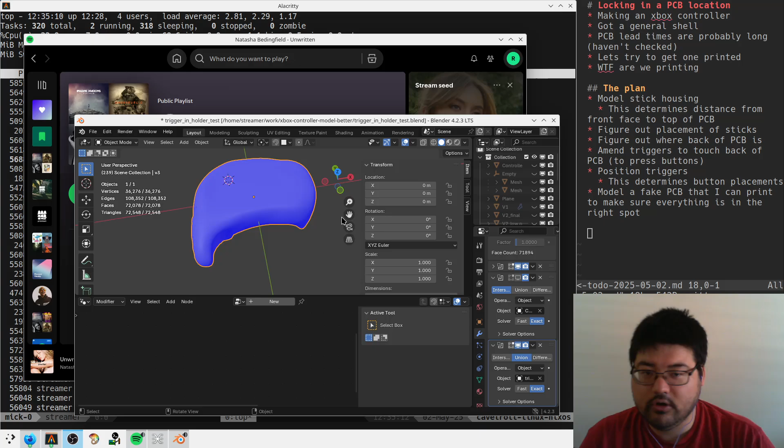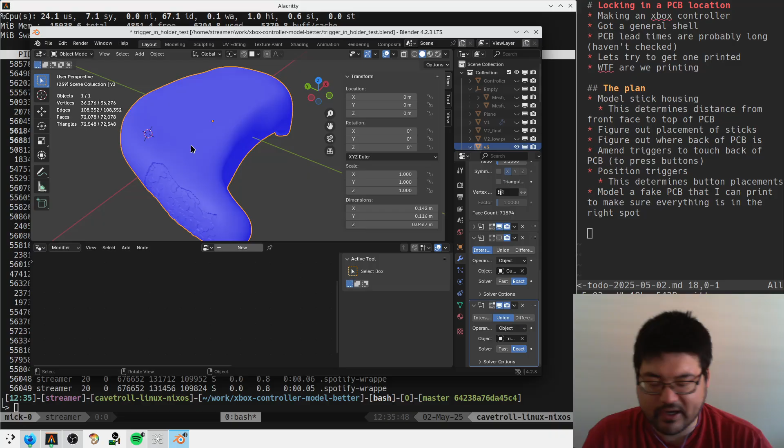Today we are trying to figure out where the PCB is gonna go in our handmade Xbox controller. Background context: I want to make an Xbox controller because I wanted to write my own firmware, so I could have the paddles on the back of my existing Xbox controller be their own buttons instead of remapping in firmware to face buttons. So obviously the next step is to just make an Xbox controller from scratch, right?

So here's the current state. We started by modeling a little guy out of clay. I just grabbed a blob of clay and pushed it around until it felt kind of okay in my hand. The controller looks kind of weird because I hold my controller weird when I'm playing shooters.

My right hand kind of wraps around the top to get more above the right stick for accuracy, and that means I don't actually rest my hand on this right nub ever, so I just didn't put it on. I want paddles on the back, and I want the paddles to kind of be like triggers, so I just found where those will sit.

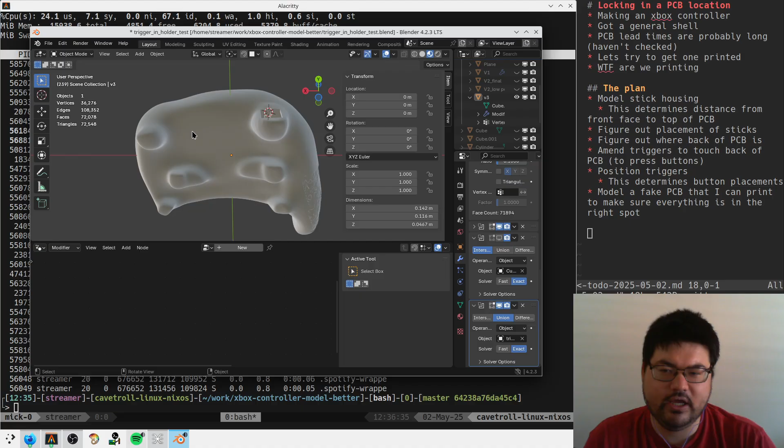Eventually we remodeled this thing in Blender, printed it, and found out we needed to add a little grip texture here, so we did that. But this is kind of a shape that feels good in my hand. I have this thing mostly printed - the print kind of failed a little bit, but holding this feels quite good to me.

All of these triggers are pressable. We've got button placements that feel kind of okay as well, just cut holes in the front to see if they felt kind of right to my hand. So that's where we are.

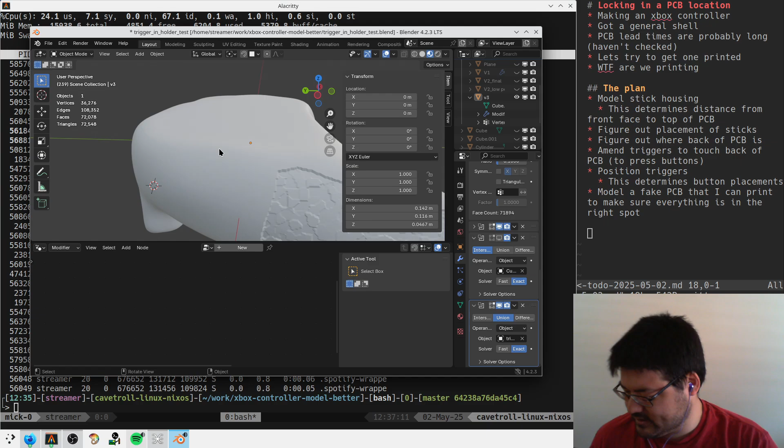So next step, I think, now that we have an overall shape, is we need to make a PCB to put electronics on, because the controller's got to do some stuff. So today I want to figure out where the fuck that PCB is going to go.

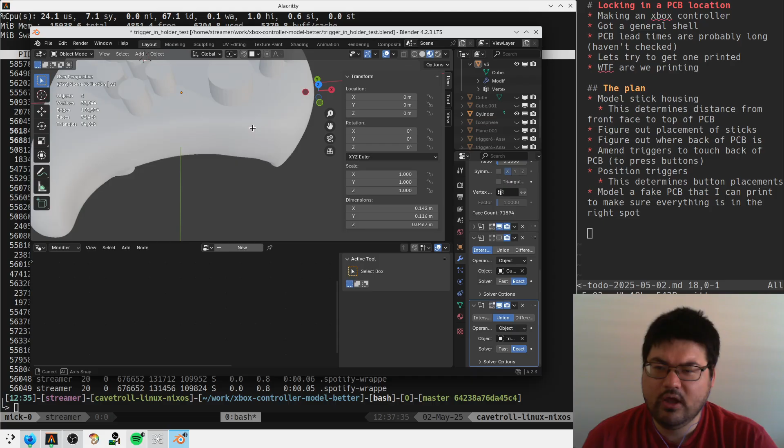First of all, we'll bring this guy back. This is where I've decided all the buttons are going to go. Where the PCB is vertically is probably determined by the stick locations, I would assume. So we're gonna have this stick coming out here, and it's gonna go into these little guys I bought from AliExpress.

Let's see if I can get one out and show. It's in this tight little plastic bag, which is a little annoying, but I've almost got it out. I gotta pull - here we go. Okay, this guy - this is an Xbox or PlayStation 5 Hall sensor replacement for the potentiometers.

This guy's gotta basically sit on top of the PCB, bloop, and then I have this PS5 stick grippy replacement that you kind of stick on top, bloop, right? This sits on the PCB, and I want this to be on my thumb. We got to figure out...

Where that will determine where the board sits vertically. So we'll kind of figure out this box will go here. It looks kind of like this.

Then once we have that, placement of the front buttons will be really easy, right? These are just directly under all of the holes for the buttons we've already put, so there's nothing really to worry about there.

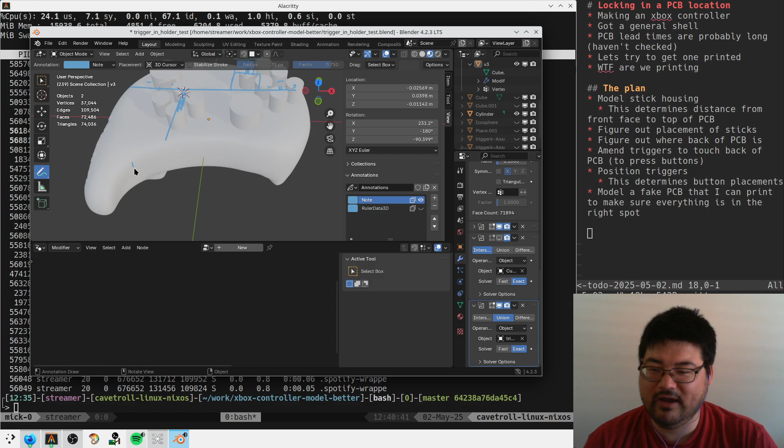Probably we're going to have to extrude this a little bit so that there's space for these sticks to press, or maybe the pinky buttons might work a little differently. Maybe we'll bring this in as well so that it's more vertical and we don't need so much backward space.

But figuring out the shape of this line depends on the height of the controller as well. So the plan of action is to figure out this guy, his dimensions, maybe model him as well so that we can figure out where the holes in the PCB are going to go at the bottom. Then once we have that, we can figure out this height. Then we can put all of the triggers in the places they're supposed to go, amend them so that they hit the right location this way, and then figure it from there.

That's the plan. Is this for one hand or some shit?

No, it's just that my right hand kind of rotates over the top a little bit just when I play games to get a better control of the right stick. And so I'm just doing it that way. Just whatever feels good in my hand, man. What's the point of making my own Xbox controller if I can't make it in a way that's comfortable for me and my weird ass grip?

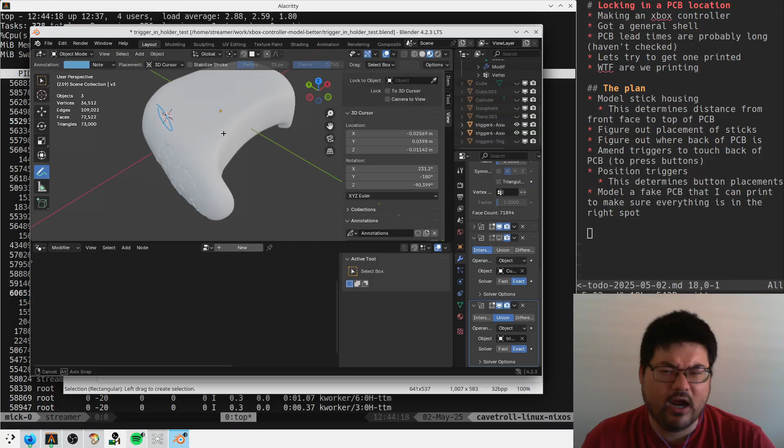Are you using Blender instead of FreeCAD, or is it for different things? I'm using FreeCAD for anything precise and Blender for anything that is... so the problem here is that this shell is sculpted. I'm kind of just freeballing the shape of this thing to fit my hands based off of the model, and I don't really know how to sculpt and modify something in an artsy way in FreeCAD. FreeCAD, I feel like I understand how to use it for precise work: make this shape, then this shape, then this shape, and stick them all together. But this is not that. So I'm using FreeCAD for anything that I want precision and mutability, something that I can work backwards and adjust later. And then importing into Blender to stitch it all together. Maybe that's wrong, but it seems to be working for now.

In fact, we do need a FreeCAD instance up now if we're going to model this housing. So really the important part here is the pad locations, basically where these pins are going to poke through. This we need to get right.

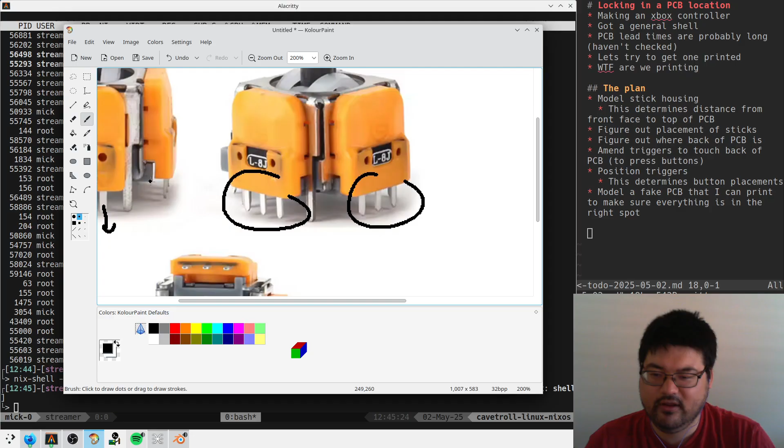So it's those guys plus this set, and then this set, as well as all of these 4 outside leggies, right?

I guess I'm going to model this in FreeCAD. We don't have to get any of the shape up here correct, we don't really care about that at all. We just care about pad placement for now, and then height.

Let's start taking some measurements. I'm not going to bother showing this because it's kind of hard, but let's start with the width of the metal box, which is around 12 millimeters. So we'll say this is 12 millimeters.

We don't really know if it's square, so I'm actually not sure which side I measured. I assume it's square, but I don't actually know - 12 on that side, 12 on that side. Can we use a different color here? Blue, light blue, what's easy to see? Purple. This is also 12.

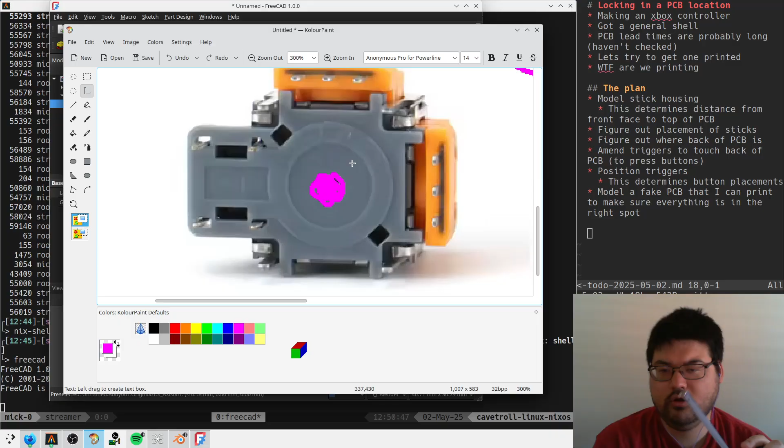Dude, what the fuck? Wait, how thick did I say this was? Did I say 12? I did, I said 12. So that makes more sense based on what I'm measuring here. So 12 is - it's so hard to tell. Hold on, I wish I should get calipers, dude. Calipers, pretty hype.

So I think this is 12, which then I assume probably means - oh, you can kind of see where the metal wraps, so that lines up, right? The metal ends here and here, which probably means that this is also probably 12 here. Probably. Let me confirm that.

Yeah, that seems right. Okay, so we're trying to figure out these things that are kind of sticking down here - these are kind of the edges of the metal box, right?

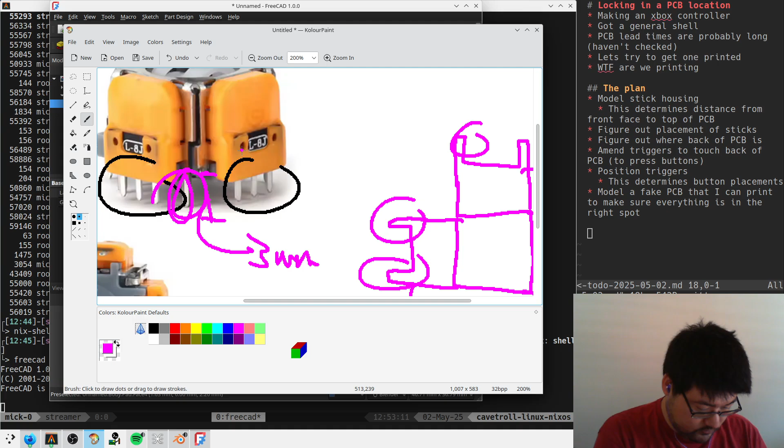Oh, only two sides of these have them. So I lied about this metal sheet. It probably looked more like this.

So they're kind of... Yeah, I don't know how thick these are. They're 3 millimeters long. How wide? 1 millimeter wide, and like less than a millimeter fat. So we're gonna just say 0.5 millimeters. Doesn't really matter, so we're gonna call this like 3 millimeters by 1 millimeter by 0.5 millimeters.

And then it doesn't matter which way we orient them yet. Eventually it will matter. So if these are on the outside surface, then it means...

Create sketch on face, please. Why? Oh, not part of active body. Why are there two bodies? Did I create a new one by mistake? There we go. Okay.

So we want to do something like project the existing geometry onto this thing. Boom, boom, boom, boom. And then we can start saying that we want these guys to be kind of on the corners. Boom, boom, boom, boom, boom, right? Overconstrained, fuck you.

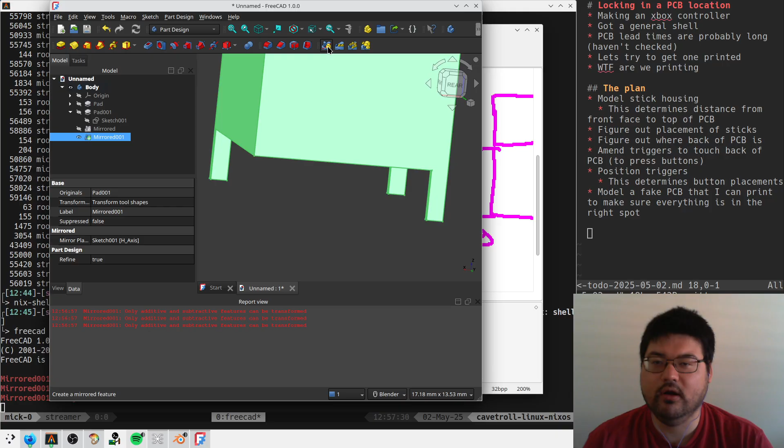Can I mirror like the sketch? I mean, we could also just add it to the sketch better. Yeah, okay, let's just do that because I don't know if we can do what I'm trying to do. So it's fine, it's fine, we'll just...

Do this. This guy's got too many constraints. Okay, fuck him, hype. Do the same shit down here. Add another box. Boom, boom, boom, boom, boom. Over constrained. And then one more, please sir. Box, box, box, box, box. Over constrained. Delete those fuckers.

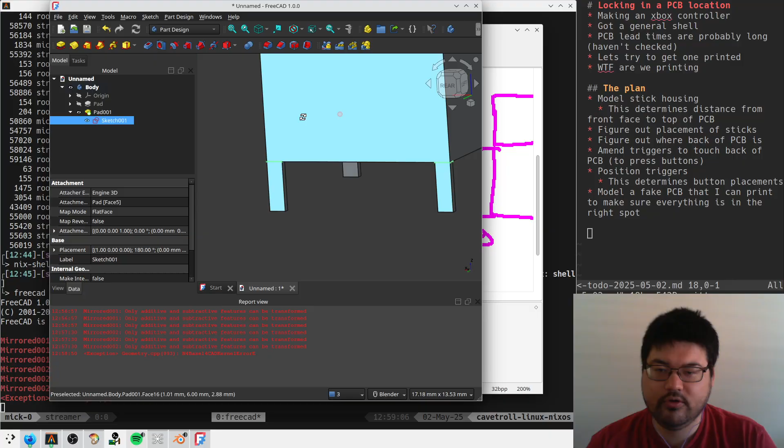Okay, and then we're going to make some equals constraints, right? So we're going to take this, we're going to say that all 4 of these walls have to be equal length. Okay, and I don't know why sometimes shift clicking doesn't fucking work, it's really annoying. And then we do the same thing with these guys. Equals. All right, fully constrained. Hype, good enough for now.

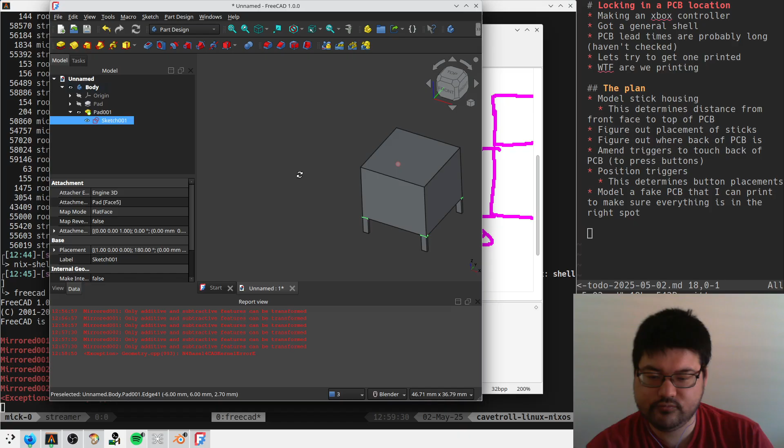You know what? I'm not gonna lie, I'm not really convinced this looks right. I'm not convinced that this is 12 by 12 by 10 because it does not look the right shape to me. Maybe it is. I'm just going to re-double check.

So it would be the height that would be wrong. No, I mean that's right. Okay, so that's 10 tall for sure, 12 wide for sure. Okay, this is why we measure, because eyeballing it, we'd get it wrong.

Okay, maybe next we tack on these little yellow extrusions. Oopsies.

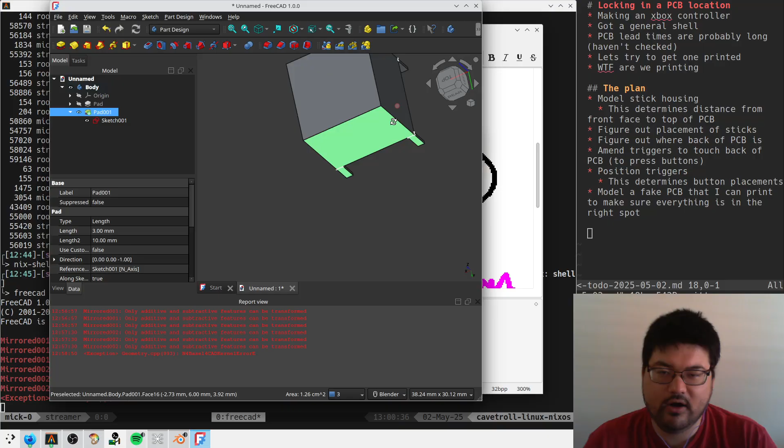So we have to make sure that these guys go on this side for one, and then because here the pins are aligned, we go counterclockwise to the next one. So we want to do this, I guess it doesn't really matter, we have to pick two faces. Oh, it does matter, the clockwise one has to be on the flat with the pins here. Okay.

I guess I measure the approximate size of this. So this is maybe like almost exactly 1 centimeter, like here. This is 1 centimeter. And then height wise, it just lines up with the top and bottom.

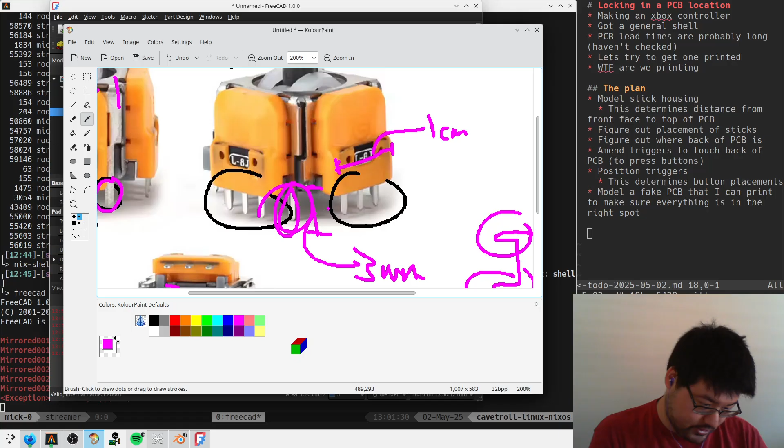So I guess we pick this face, new sketch, and we draw a box again, projected onto some of the external geometry that we care about. Probably like this shit, and then we probably care about the x-axis, but we don't have to project that. So maybe we can get away with only one projected line, which is the top line, I think.

And so we go, you know, two points of the box are constrained to that line, two points are constrained to the x-axis. And then we probably want to say that these things are symmetric over the y-axis, probably.

I thought many components had 3D models available. Is this part of the modeling experience? This won't. I did check.

So this just came from AliExpress, right? This is like an internal PS5 component that someone's copy pasted and then sold on AliExpress. I don't think this is a thing that we just have models for, because Sony's not going to publish their stuff, and the AliExpress guys, the point of these things is usually as a replacement for something that already exists. So nobody needs to measure this. Nobody's making this, I'm just repurposing this for my own thing.

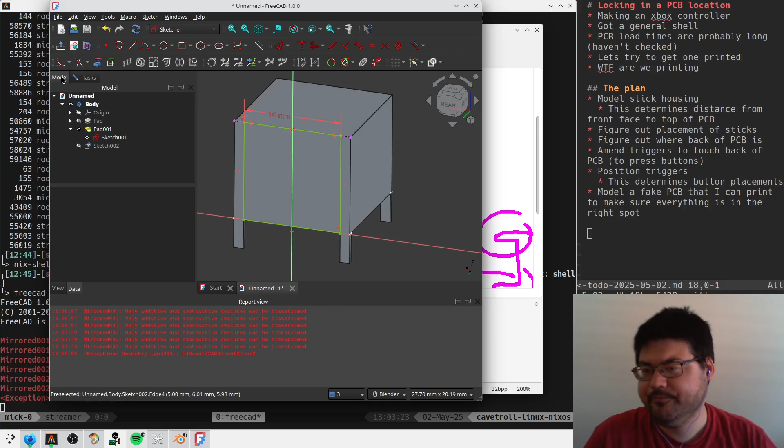Okay, so we close this, pad it by 2. All right, we're starting to look good somewhere. Let's do the same thing on this face. We project this guy, make a little box. Bop, bop, bop, bop. Over constrained, delete.

This we want to be horizontal. He doesn't like that constraint for some reason. Oh, maybe this guy we have to make horizontal. No, he doesn't like that either. Maybe it's this guy has to be vertical. There we go. And then the same thing where this is 10 millimeters. And then is this centered?

Yeah, fuck it, pretty sure. Pretty sure. Boom, boom, boom, symmetric please. And then he's fully constrained, so I guess we're chilling. And then we pad this guy up by 2 millimeters as well. Boom.

Okay, so now pin locations for the bottom of this guy. Where are these? So I guess measuring distance from the two sides, distance from the front is probably the play.

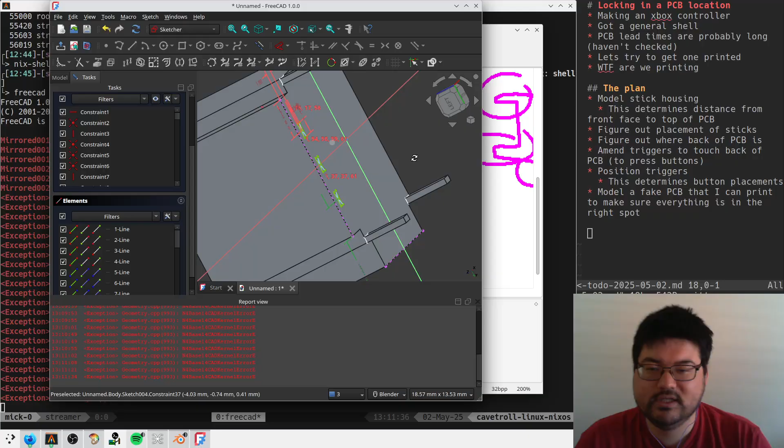Seems reasonable. This drawing is a fucking disaster. But I think that's correct. Okay, how tall are these fuckers? Like 3 millimeters.

So we take this, we say we're finished drawing for now. We'll come back to do the other pins. Pad 3. Look at that, guys, look at this. This is coming together, it's coming together.

Okay, let's do the same on the other side. I should probably save. We'll call this stick like housing or something. I don't really know what this is called, but we'll call it this.

Uh-oh, why is he mad? Sure, I guess it's kind of more this one. Okay, so we just need to give a lot of the same treatment over on the bottom as well. I think we do similar shit where we draw a box with a cross in the middle.

Okay. These are equal again. This guy's like, yo, you're over constrained. Fuck off. Whoa, what the fuck just happened?

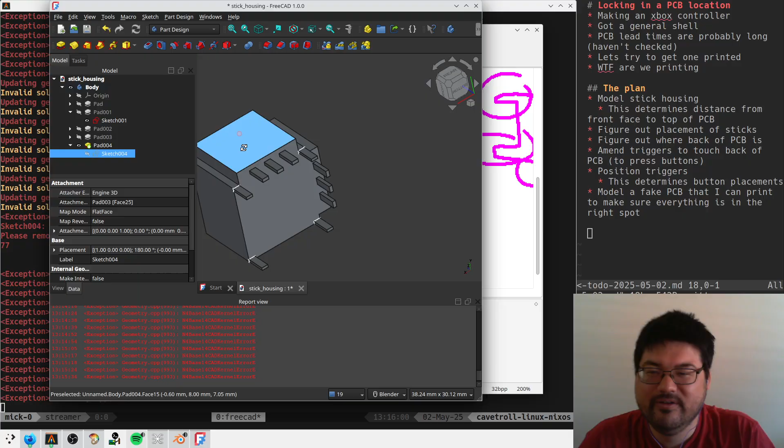Alright, so now we just need to get the clicker. So when you press down on the stick, let's see if I can show it. There's a tiny button out on the side, and when you press the stick, it presses that button.

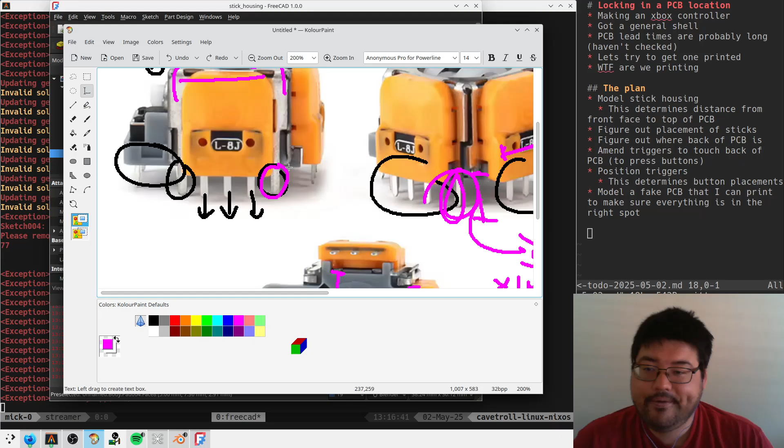So that guy lives kind of like here, so we have to model that as well. It doesn't really matter too much. I don't think that his profile is going to come into play, like where this guy's extruded. I don't think that's going to matter. But might as well just model an approximate box for that. Like, why the fuck not?

So let's call him maybe like 0.5 centimeters tall. And I actually don't know how many millimeters wide this is. Looks like 9. Weirdly, okay. So 9, and we said this was kind of 0.5, and then this was 9, we said. Okay.

This button, actually, is probably a known thing as well, so we might be able to leverage that.

It's content dense, just like Sparrow. We like it, lots of content, some of it clever, some of it a little dense. Rude, but true. Okay.

I wonder if that's the play, is we try to guess which button they have in here. I bet you it's just one of the popular ones. Okay, PS5 DualSense - what is the PS5 controller name?

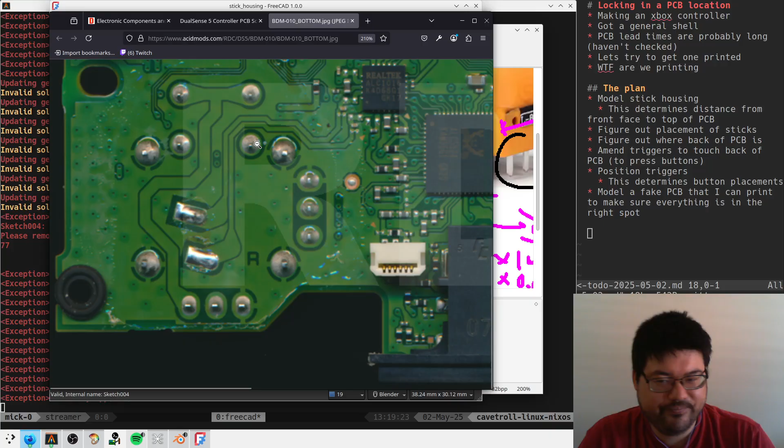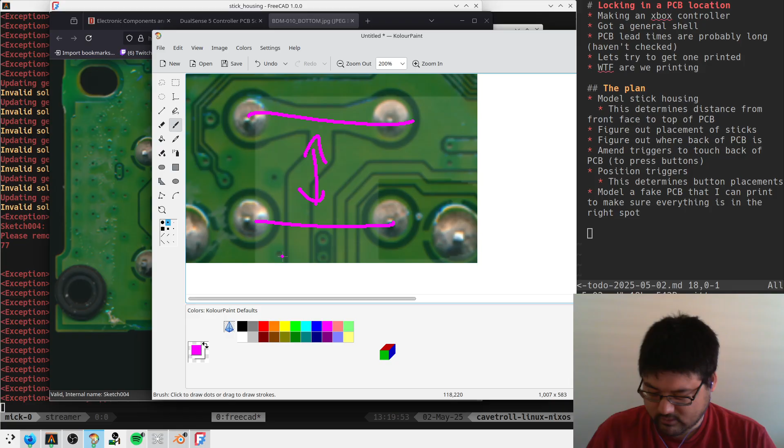Like the fact that these two pins on the switch are bridged together and these two pins are isolated. A switch is really supposed to be a connection of two things, but these buttons have four on them. So we know that it's switching this way, not this way - these are bridged, switch across. We also know that it's a typical button shape and color, like we've got this black little nub, square, little black segment here. We've probably seen this before.

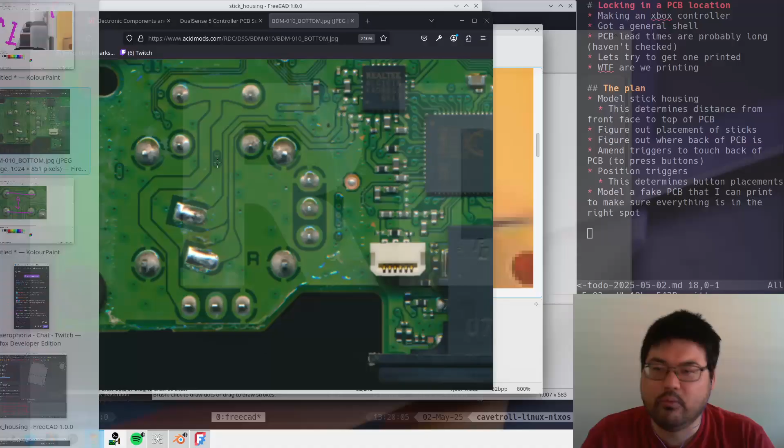If we just go to DigiKey and look at tactile switches, and look at which one they have a ton of and are cheap, it's probably one of those. What are the chances that it's this guy? Seems pretty high to me.

The pins might not be bent like that. Also if we sort by - okay yeah, those are 13 cents. We also need something through-hole mounted. If I remember correctly, when we looked at this data sheet before, there were a ton of variants, but all of these sit on top. So can we say that we want something that's through-hole? I don't know which - is it this? This, right? I don't know which is which, but okay.

We picked - we saw another one, the other guy we pulled. This guy, what's his connection, what do they call it, what is this thing called? Termination style - PC pin, okay let's click that. I wonder why they're all curved, are they supposed to be? Is PC pin different than just a straight line?

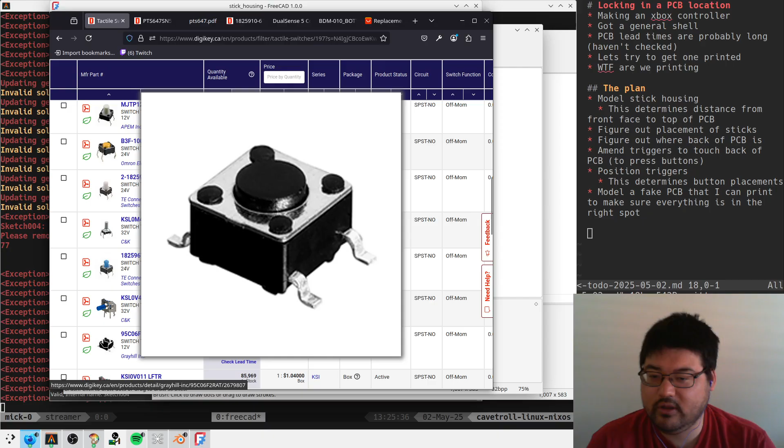Yeah, it's gotta be this. It's gotta be. Okay. So like, popular things that look like this that are...

I feel like that thing we opened here, this one seems like a pretty good bet. Let's see if the sizes line up. Oh Jesus Christ, does it tell us here? 4.5 by 4.5.

Nah, this is more like 6 by 6, which I guess we can narrow down here some more, right? We can look for 6 by 6 millimeter here. So like maybe this thing.

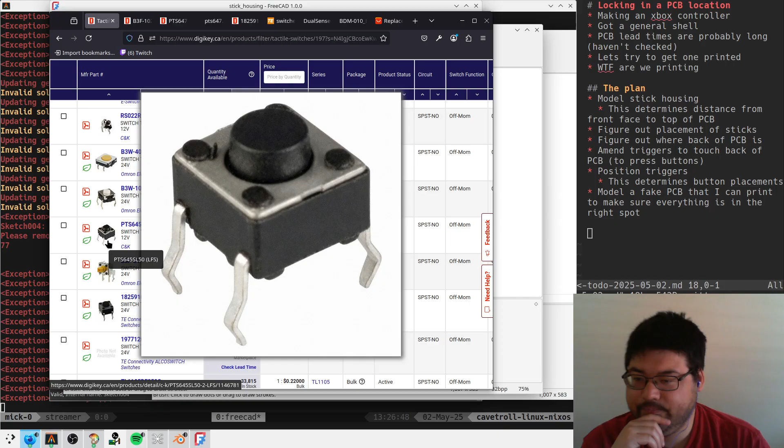It also doesn't have to be the exact right one. We just need a model to slot in as a placeholder. And need is strong too. This is probably taking more time than if we just did it ourselves, huh?

But fuck it, let's just yoink a model. Doesn't really matter, huh? Fuck. What about this one? Yeah, sure, sure.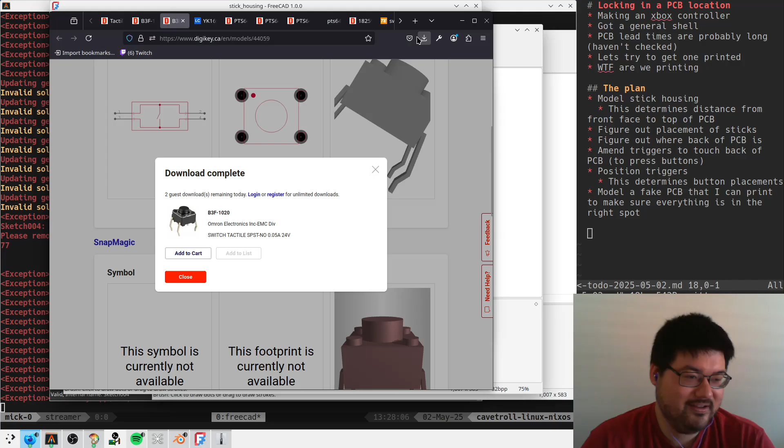But we're already too deep. Blaze it. What's this thing called? B3F. Okay.

All files. Alright, let's just see what that does. So, is this 6 millimeters? 6 by 6, nice, by...

3.5, which maybe is right. I actually can't tell because it's inset into this thing, but it's a pretty good guess. And then these pins are probably around like 1.5 millimeters long or something.

So this is... oh, but it's like from the bottom. So where's the origin? Here. So what is this position? 2.6? Probably not, but okay.

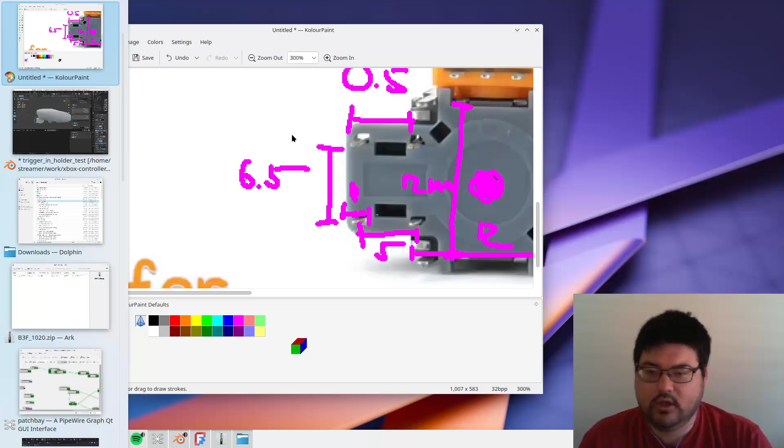Okay. Can I create a sketch on this thing? So there's like some box that's gonna come out of this. Oh oops. We're basically just gonna extrude some box here. It doesn't matter that much, but we need to make sure it's at least fat enough, right?

So like, you know, boom, oopsies. Okay, so did I measure width of this thing? I said we can probably figure it from the measurements we have.

We said this is 6.5, and then so that means this has to be 8.5 to have 1 millimeter padding on each side. And then this extrudes by 0.5 this way, and the height doesn't matter. Doesn't fucking matter.

So this is symmetric here. And then is this thing fully constrained? It is. Okay, so we pad this out now by... what, 0.5 what? Surely that's 0.5 centimeters. So 5 millimeters, surely, which looks about right.

How do I get the right angle here? There we go. Yeah, yeah, fuck it, that looks about right. Okay.

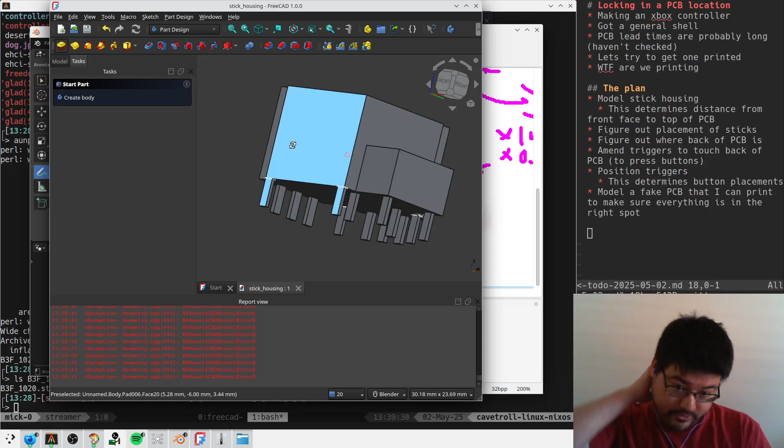All right, dude. Pretty sick. Okay, so we also need the top profile here.

We need to know how high up, is that true? Do we need to know how high up the stick goes? Probably not, right? Because, like, this guy, what gets, like, this put on top? So probably we care about, like, where, like, the bottom of this is, right? The, like, little, like, shell shit.

And I think that it, like, basically kind of comes over the edge of the whole box. Like, it's kind of lower in Z. So in reality, as long as the top of the controller is above this, I think we're chill. And then we'll probably just add like a little baby bump in the shell here so that the controller can fit. So I think this is probably about it.

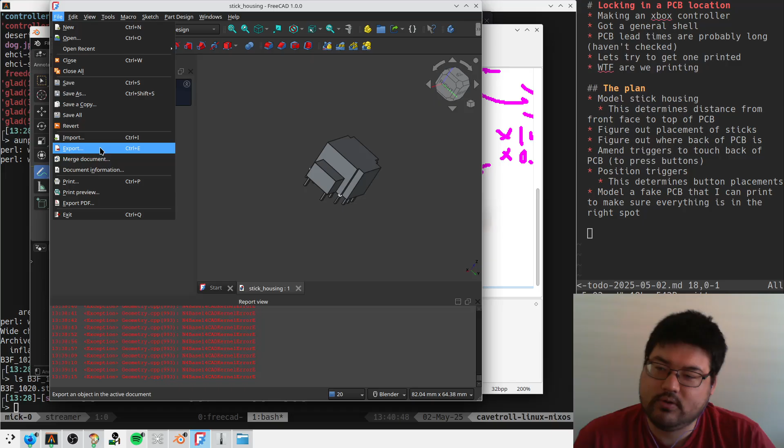We probably want to be about this far. Um, yeah, fuck it. Sure. So can we just like export this thing as it is? Let's just double check, I just want to look at the bottom and make sure that I agree with these placements.

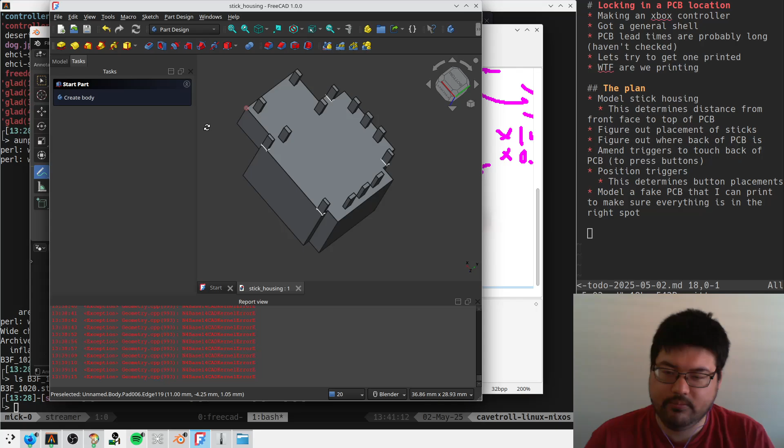Almost. Um, it's wrong a little bit. I think that the outside pins, like the ones attached to the metal sheet on the outside, you'll notice that like here on this picture, this is to the right of this, right? And that's not what we're seeing here. He's to the left. And so I guess it means that these pins, I do not think are on the very, very outside, right?

Right? I think that we have not taken into account this distance. I think we've kind of assumed that this is over here, like right on the very fucking edge. So, can we fix that? Why is that not the case?

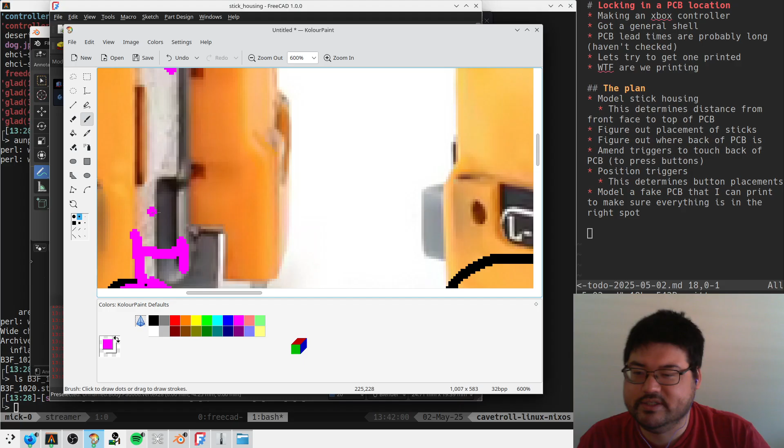I wonder if I can show you here. It's this. So we kind of measured to this distance here, right to the edge, which kind of lines up with this. And then there's a little bit of a cut in here that we didn't notice.

Do you not have a data sheet for the joystick? No, I do not. We just bought this from AliExpress. Yeah, somebody else asked earlier. Basically, I assume I didn't look very hard for one. My assumption is that Sony has the datasheet for the original, and other people have copy pasted it. But I don't think there's a date. I didn't buy an official part. I bought some no-name Hall sensor replacement from AliExpress. So I don't really know what this thing is at all. I have no information. The use case for this thing is supposed to be somebody wanted to replace the stick in their controller because it had stick drift. So I don't even know if it's good.

But luckily, if we buy any PS5 replacement, it will always line up, which is kind of hype.

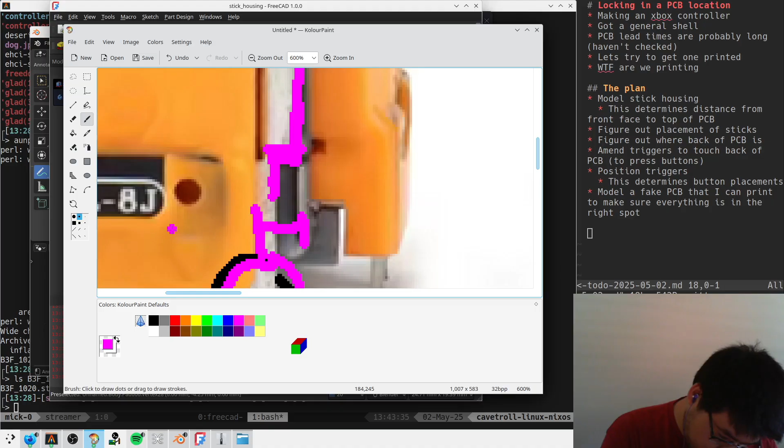All right, time to figure out what that distance is. That's probably 0.5 mil. Wait, how? I can't really get my tape measure in place there. That could be a full millimeter. It could be. If we think this distance and this distance are about the same, which I think they are, let's try insetting them by a millimeter and see what happens.

I'm pretty sure this is the exact one he has. How did you find this? Is it? It'd be kind of sick.

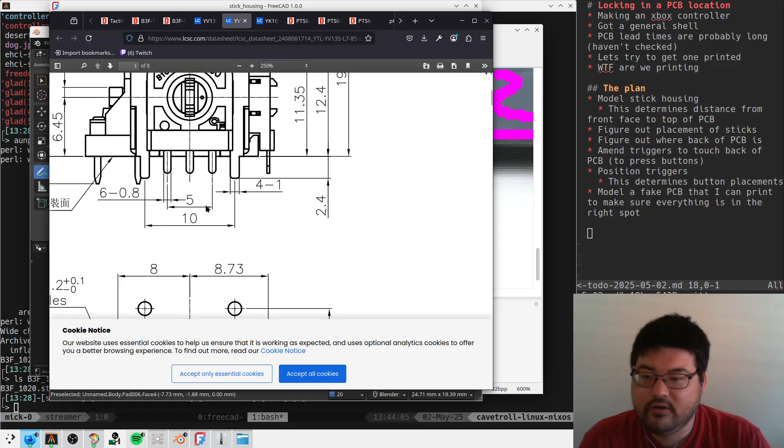No, I don't think so. Let me pop off these guys a little bit. No. Oh, mine has a big magnet in there, which might not be the same. I didn't see it clearly enough, my bad. Oh, no worries, no worries. That's a good guess. I don't even know how you found this.

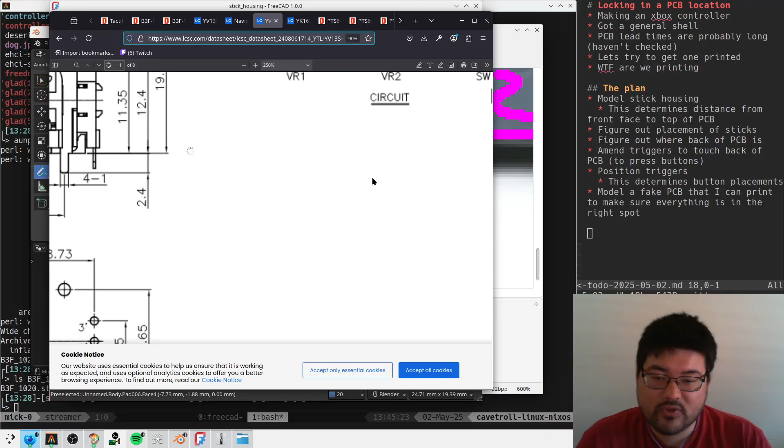You went to LCSC and probably just browsed the joysticks? That wouldn't shock me if I'm just rebuying something that exists online. I wonder if you... Yeah, I wasn't really convinced that this was a thing that was present on the internet. Yeah, I think that this is potentiometer based. The thing I have is like a magnet with Hall sensors. But probably close, probably shape wise it could be the same. But fuck it, we're already here.

Alright, which one of these bad boys is the thing I want? Probably this. Can you buy from that site as a single person? Probably. I think I've heard that it's like Chinese DigiKey, and on DigiKey you sure can.

So we wanted to try insetting all of these by 1 millimeter, which means removing this constraint that ties it to this line, which means that this should kind of be free now. Fuck, it's not as easy as I hoped. Does this guy have... there's so many... it's not easy. Okay, we'll just delete this line, and then delete this line, and then go again.

Oops. Okay, so this is 1, and then we wanted this distance to be 1 as well. Not 1 micrometer, you dumb fuck. There we go. And then is this not fully constrained? Why not? This - so what was our length here? Probably 0.5. Okay, oh, and then we have to do that for all of them? Fine. Fine.

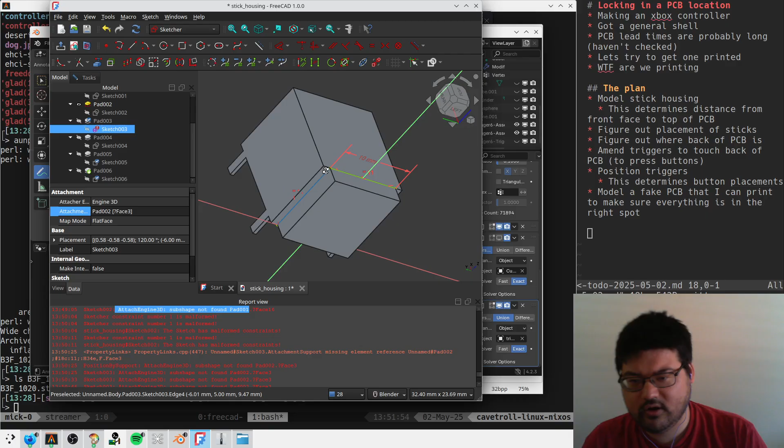Okay, so this guy, we want to make sure that he's attached to the right face. What the fuck? Hold on. I think we fucked up. I think this sketch was supposed to be... Yes, I think we accidentally bound them both to the same face. So this one's supposed to be this face.

And then this guy was supposed to be this face, probably. Oopsies, there we go, okay. Does that fix everything? Recompute? Oh, I fucking hate everything, dude. What a shitty program. Okay, I'm tilted, I'm tilted. It's fine though. So this is just supposed to be attached to the fucking bottom.

Okay, save, refresh. This guy's also mad. So like, what's he supposed to be doing? This is supposed to be attached to this face, sure. Dude, this is the worst. I actually don't know anymore. Fuck. God damn it, dude.

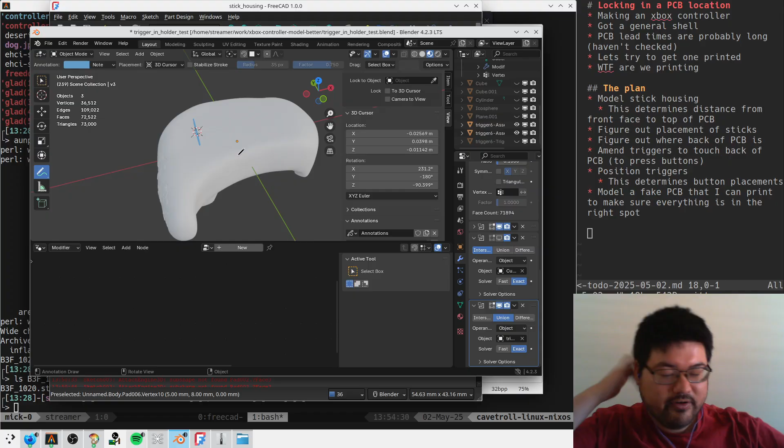And so we kind of started by modeling something out of clay and 3D scanning it. Then we made it into a better mesh and 3D printed it, made some amendments until it felt good in my hand, which brings us to, hello, where the fuck am I? I would like to show version 3, please. Why is it this button? Sorry, Blender's gonna tank my CPU and memory for a second here.

There we go, which brings us to this guy. So, you know, this is like his approximate shape. He's gonna have his buttons kind of laid out here. And we've printed something along those lines here, right? So this thing fits pretty well in my hand. He's gonna have some paddles on the back. He's got some grippy section here so that my hand doesn't slide around. Kind of like placement of the sticks feels about right.

And so we are kind of slowly today trying to figure out where the PCB is gonna sit in here, which is kind of determined by the height of - I guess we have a picture here - it's gonna be determined by the height of this thing from AliExpress that I bought. So these are Hall sensor replacement sticks for the PlayStation 5. I didn't know where to get a model for these, or if there even is one. So we've just been kind of modeling this today in FreeCAD. We've got something that approximates the pin locations and stuff.

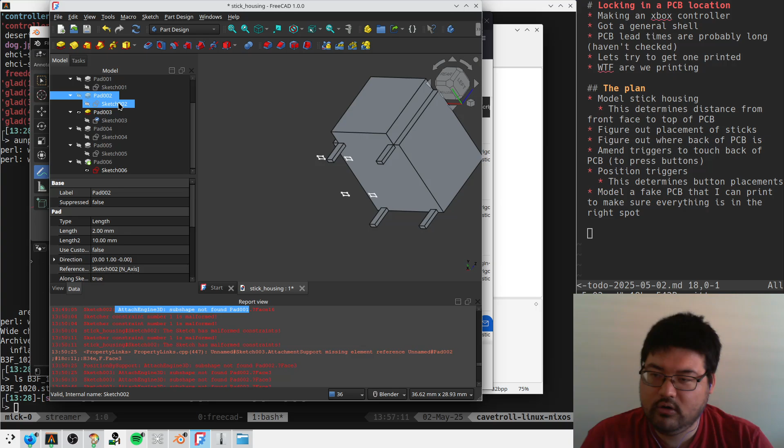Oh, hold on, we fucked something up here. One of these got attached to the wrong face, so we'll just... okay, no, recompute. There we go. I think that's right now.

Why did we lose these pins? Am I fucking high? What the fuck happened? Oh, this. Okay, god damn it, dude. God, everything's so fucking hard. So we just have to do all of this shit again where the face IDs just got fucked up. What a fucking garbage program, dude.

Okay, so why doesn't this work anymore? Attachment editor. Because this thing is not extruded. Why is it not extruded? Because this is on the wrong face again? What the fuck? This goes here. Okay.

Recompute, please. Recompute here? Visualize? Okay, there we go. That's better. Which means that this we can probably now heal to this. Now everything's happy all the way down to here. Then whatever the fuck this is, broken.

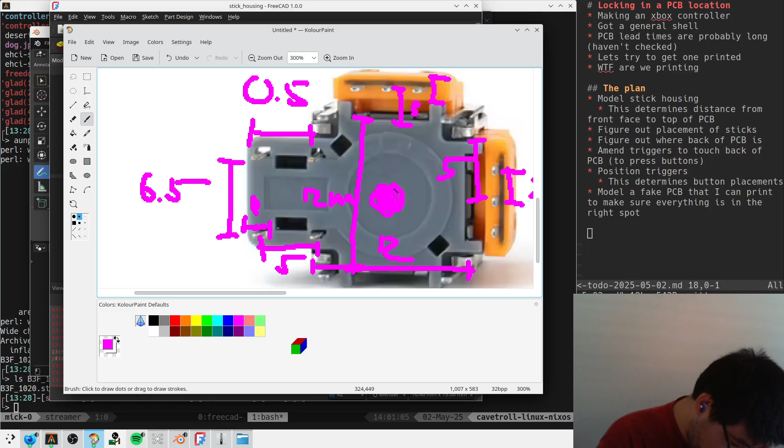What did we fuck up there? I guess, is this centered in this? I thought it was. Yeah, that is. So that probably means that this extrusion is not large enough. This edge, this is 2 millimeters, which I guess is not true.

Yeah, I think that's 3. I think that is 3, which hopefully doesn't fuck up all of these face IDs again. More like 4 based off what you said. Is it? What is the distance between these pins?

So this pin and this pin should be around 3 millimeters apart. So this is at... what axis is this, the y-axis? So this is at 6 millimeters. This is at 7.2. And then this whole extrusion is like 2 millimeters plus some gap?

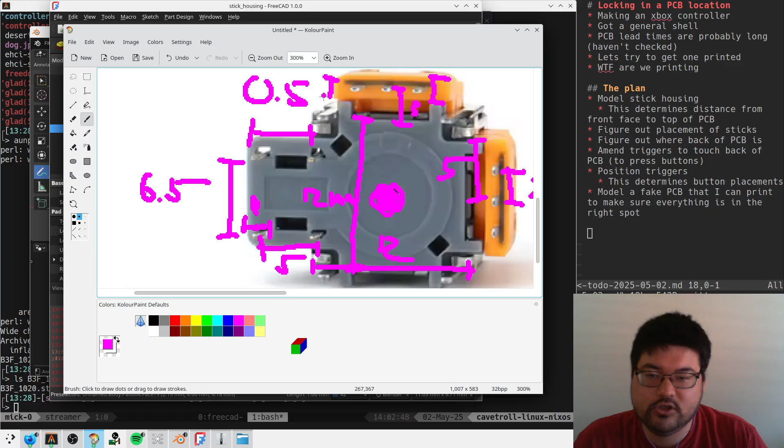Maybe it's 4. Yeah, maybe you're right. Yeah, I agree, I think it's 4. Because I think this hole is... I think this is 2, and this is 2 as well. Which would make this 4, which I think makes sense. Yeah, I agree.

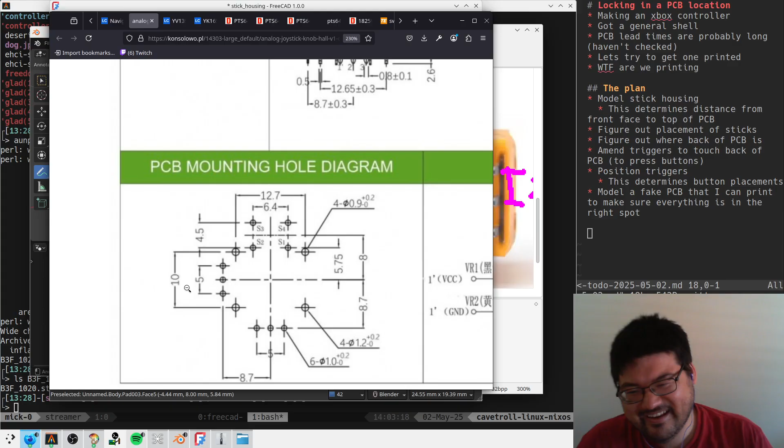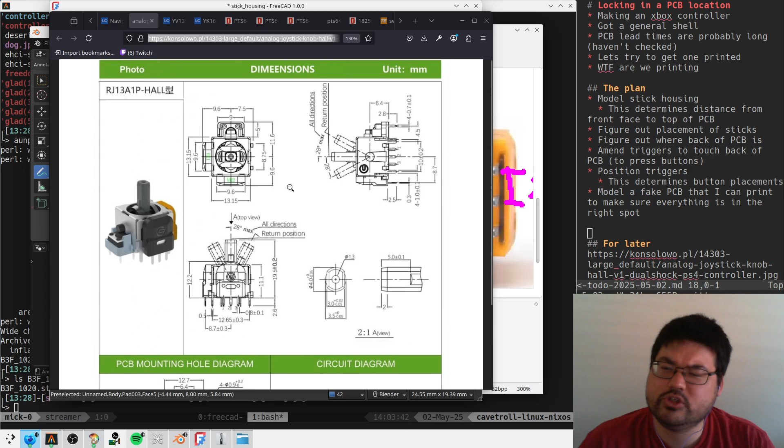So we were going to the pads for these guys and trying to change this pad to 4 millimeters, and then probably this pad to 4 millimeters as well. Okay, which seems to have recomputed correctly. And then eyeballing the bottom again.

Like this. Yeah, that feels a lot better. I'm less sure about this. Let me look with my eyeballs. No, that could be right. Yeah. Yeah. I think that's probably right.

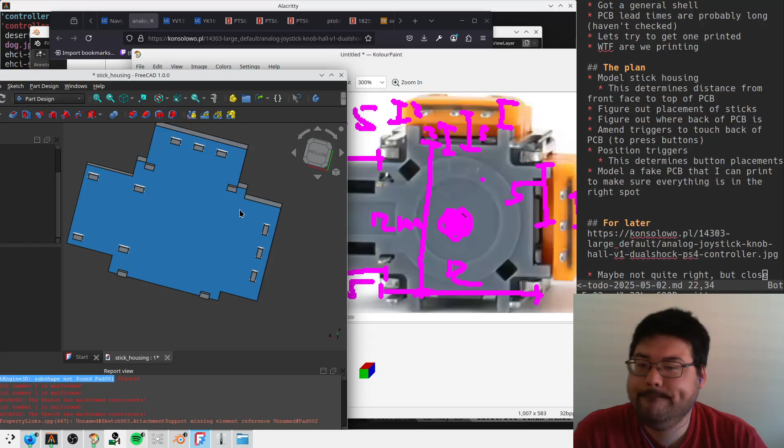Let's do that. It might be 0.5 millimeters too far, but you'll have to figure it out. It's hard to see from here. Yeah, I mean, I am going to print a plastic thing and drop this guy in to make sure that everything I got was right. But seems good. All right, cool. So let's export this. Select object, fine. And we'll do this, and then we can pull that in here.

So import STL of this guy who is in the wrong units. That's kind of fun.

Can we just select this and bring it down to millimeters? And I guess kind of hand-wavy, which way does this go? I guess technically it doesn't matter. We can orient this however we want.

Cool. Can we... how do I... I guess we go back to cutting a hole with these. Version 3, we do the... which one of these booleans? Is it any of these booleans?